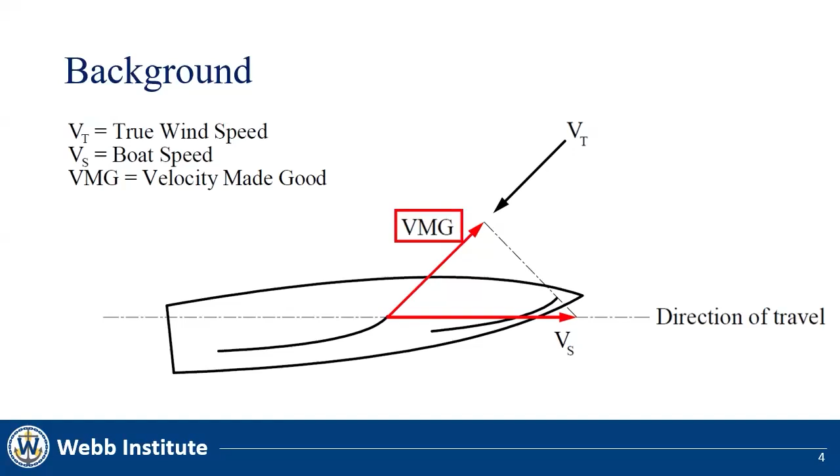One way to increase VMG is by decreasing the leeway angle of the sailboat with keel rotation. The leeway angle is the difference between a sailboat's heading and direction of travel, and is essentially the angle of attack of the boat. When the sailboat moves through the water, its hull and appendages act at the leeway angle to create lift. By rotating, the keel acts at a greater angle of attack, which can be described as the sum of the leeway angle and the keel rotation angle. At this angle, the keel contributes more lift to the hydrodynamic force balance.

The lift provided by the hull and appendages must remain constant to maintain equilibrium, so the leeway angle will decrease to orient the hull at a smaller angle of attack. Consequently, the sailboat is better aligned with the flow of water, and its resistance is lowered. Because of this, the boat's velocity will increase, and with it, VMG.

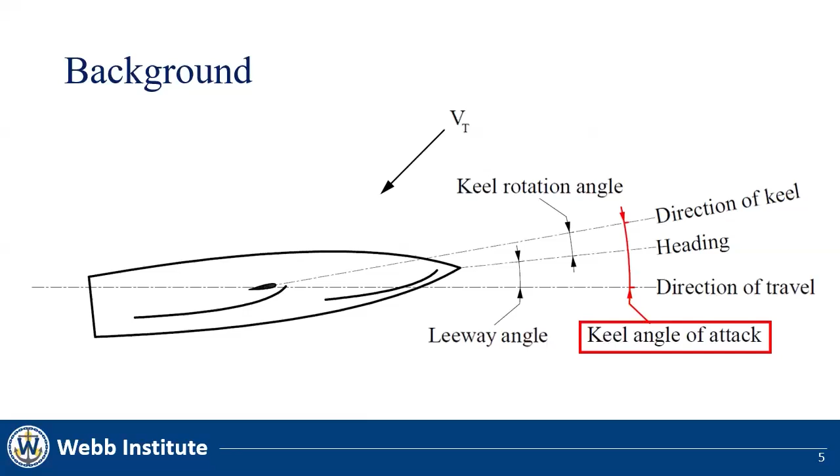One sailboat was found to use keel rotation to successfully accomplish this effect. This is Rampant, a sailboat created by Roger Martin Design in 2004. Her keel is mounted on a rotating drum whose angle is controlled with a line in the cockpit. The design engineers claim Rampant outperforms her velocity predictions, but no information has been published regarding the impact of keel rotation on performance. This brings us to the objective of this thesis, which is to determine the effect of a rotating keel on the upwind performance of a sailboat using a computational fluid dynamics-based velocity prediction program.

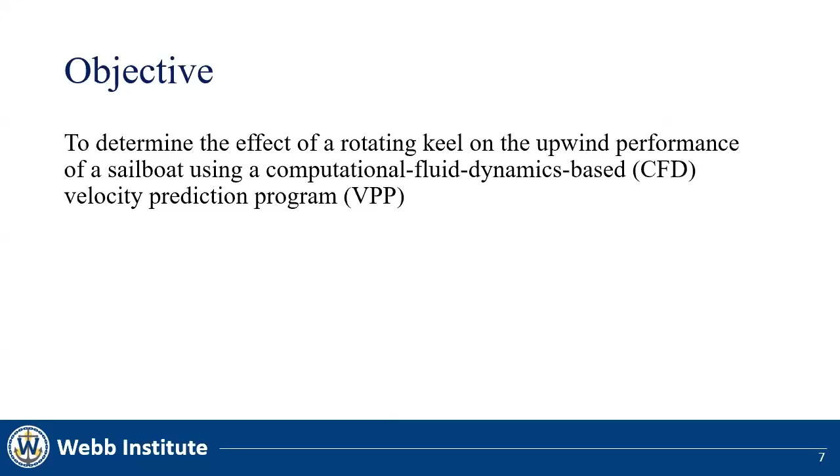I will continue by discussing the theory before explaining the convergence study. I will then pass the presentation off to Rayne, who will describe the VPP workflow before discussing our results and conclusions before closing with recommendations for future work. Courtesy of Farr Yacht Design, the test vessel for this thesis was a Farr 36. This is a medium-sized sailboat raced in high-performance settings, which made it a suitable candidate for analysis. To evaluate the impact of keel rotation on its performance, we decided to create a VPP.

To predict the performance of a sailboat, a VPP balances sail forces against hull forces until a state of equilibrium is identified. Like any steady-state dynamics problem, there are two conditions which must be satisfied. The sum of the forces is equal to 0, and the sum of the moments is equal to 0. Here are those two equations expanded to account for the most significant forces and moments in this problem. For the force equilibrium, this means that the thrust from the sails must equal the resistance from the hull and appendages. For the moment equilibrium, the heeling moment from the sails must equal the righting moment from the hull and the keel. When these two equations are balanced, the steady state boat speed, heel angle, and leeway angle can be identified.

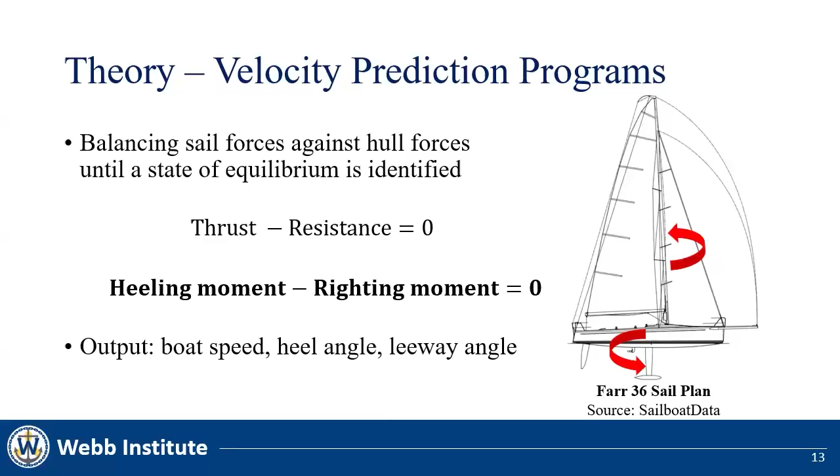There are several popular methods for modeling the forces acting on a sailboat in a VPP. Choosing a method to calculate the hydrodynamic and aerodynamic forces largely depends on the computation time and required fidelity of the VPP. High fidelity VPPs will use fully viscous computational fluid dynamics, or CFD, to model hydrodynamic and aerodynamic forces. While these VPPs produce the most accurate results, the computation time is longer.

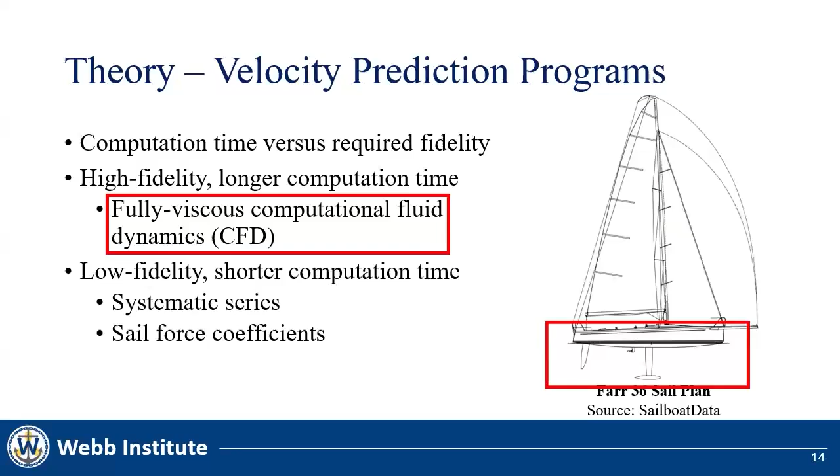In contrast, low fidelity VPPs will model hydrodynamic forces with systematic series and aerodynamic forces with sail force coefficients to characterize the effects of the mainsail and the jib. These VPPs are less accurate, but they have greatly reduced computation times. To create a VPP with minimized computation time and enough fidelity to resolve the small effects of keel rotation, it was decided to use CFD for the hydrodynamic forces and sail force coefficients for the aerodynamic forces.

The sail force coefficients used today by the Offshore Racing Congress are based on coefficients developed by Hazen in 1980. For context, the ORC is an organization who creates ratings to handicap the performance of sailboats so that different sailboats can race fairly against each other. To do this, they developed a set of coefficients which could be used to predict the performance of any sailboat.

These coefficients describe the lift and drag of each sail as functions of apparent wind angle, which is the angle of wind experienced by the sailboat. When sailing upwind, the apparent wind is stronger than the true wind because the speed of the boat adds an extra velocity component to the wind speed.

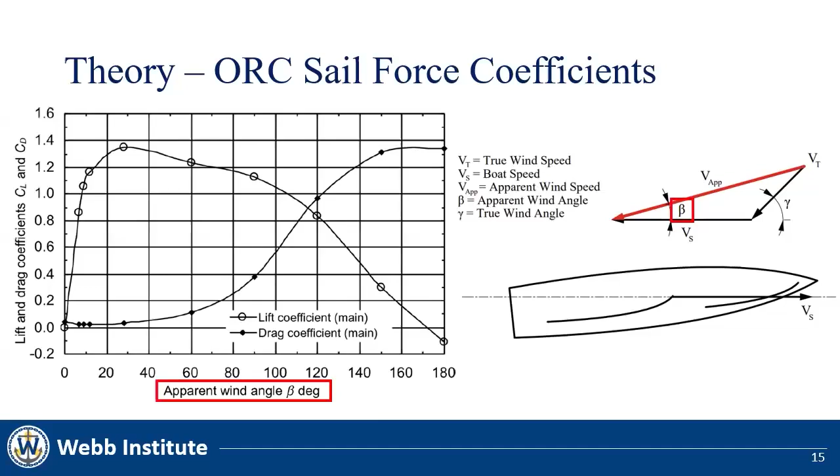In the graph shown above, these coefficients represent the lift and drag of a mainsail. While these coefficients may seem like they are specified at random intervals, these apparent wind angles actually represent typical points of sail encountered while racing. Using these coefficients, the lift and drag of any sail can be calculated using rho, the density of air, A, the area of the sail, and V, the apparent wind speed.

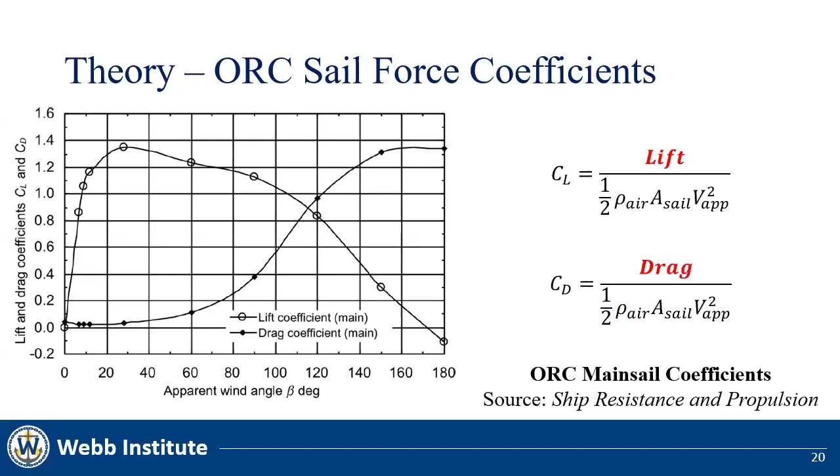These coefficients are the basis of the ORC velocity prediction model used to develop ratings for sailboats, and are what we will use to calculate the lift and drag of each sail in our VPP. To characterize the hydrodynamic forces acting on the sailboat, we chose to use CFD. But what really is CFD? CFD is a numerical simulation of a body in fluid flow. Using the Navier-Stokes equations to numerically solve for the behavior of complex fluid flow, we can calculate the forces acting on a body in a fluid, such as a sailboat sailing upwind.

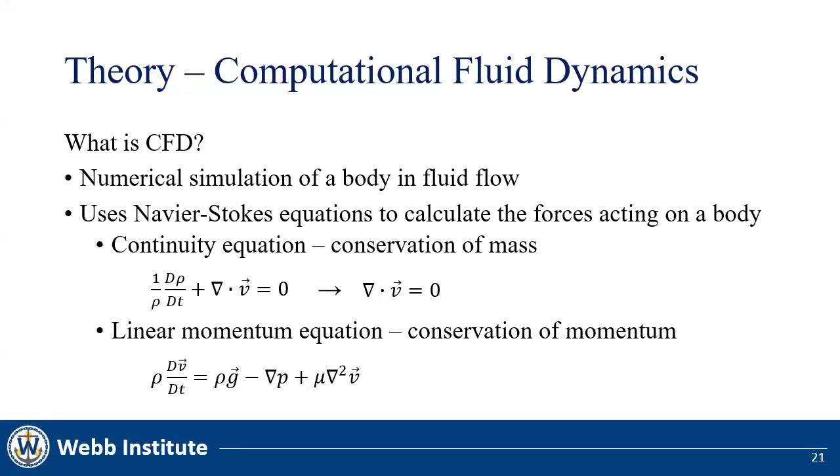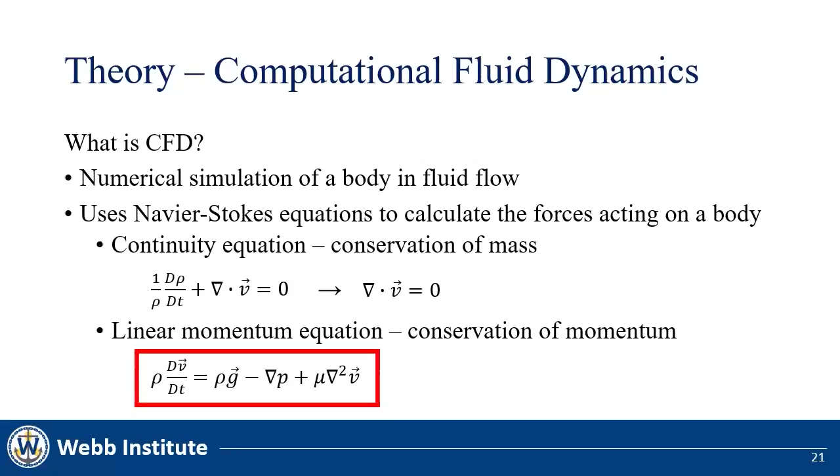The Navier-Stokes equations are comprised of two governing equations, the continuity equation and the linear momentum equation. The continuity equation states that mass is conserved across the boundaries of a problem, meaning that mass is neither created nor destroyed. For incompressible flow, the continuity equation simplifies to this equation, because density is constant. The linear momentum equation states that momentum within the domain of the simulation is conserved over the course of the analysis.

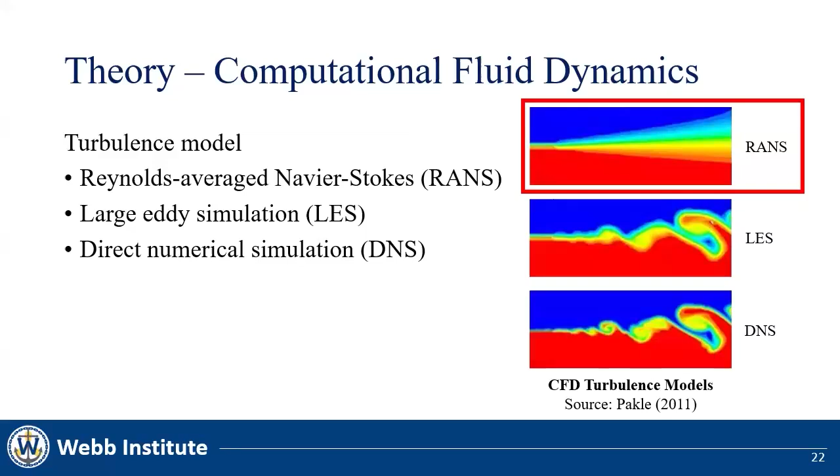We elected to use RANS because it is computationally efficient compared to LES or DNS, and the refinement of the solution is acceptable for our analysis. RANS is also the model of choice in other CFD-based VPPs.

Before creating the VPP, it was necessary to complete a convergence study to develop the computational domain of the simulation. A convergence study is performed at the beginning of a CFD analysis to identify the optimal domain size, mesh density, and time step. Each parameter is changed while observing an output of the simulation, for example, resistance, as it approaches a single converged value. A trade-off must be made between increasingly accurate results and extensive computation times. The goal of the convergence study is to identify the computational domain which provides the best answer for the shortest computation time. The first parameter we iterated on was domain size.

The domain size is the computational extents of the simulation. We followed the guidance of the International Towing Tank Conference on establishing a base domain size, which can be seen here. We then increased the domain size in all directions by 10% and 20% and monitored its effect on resistance.

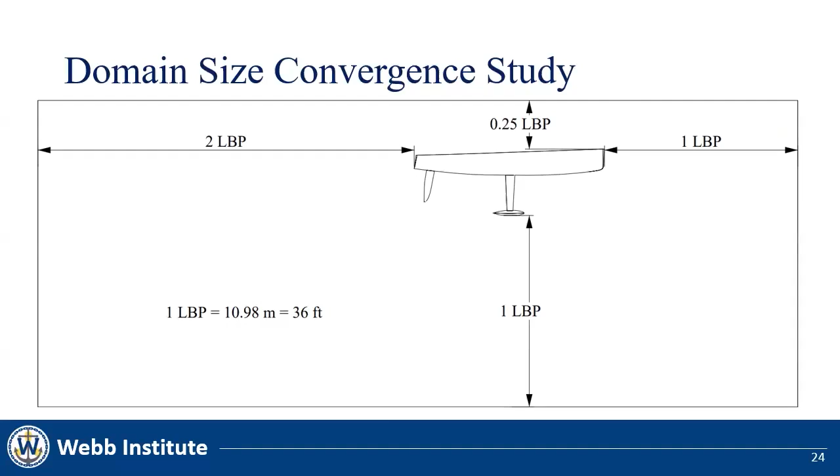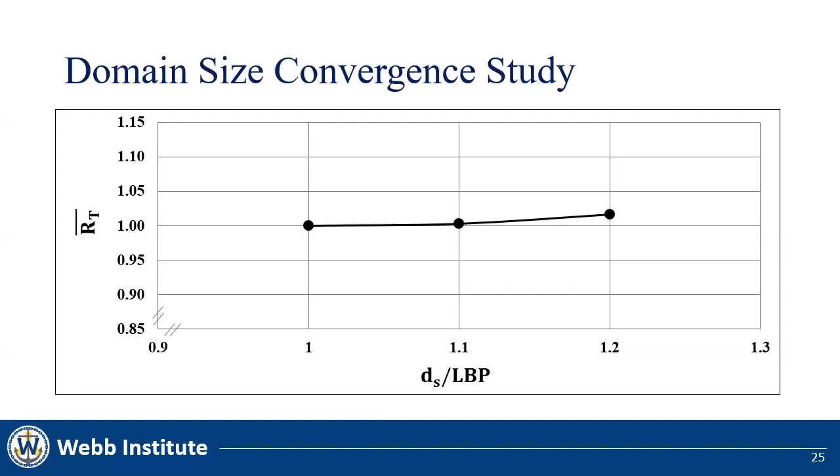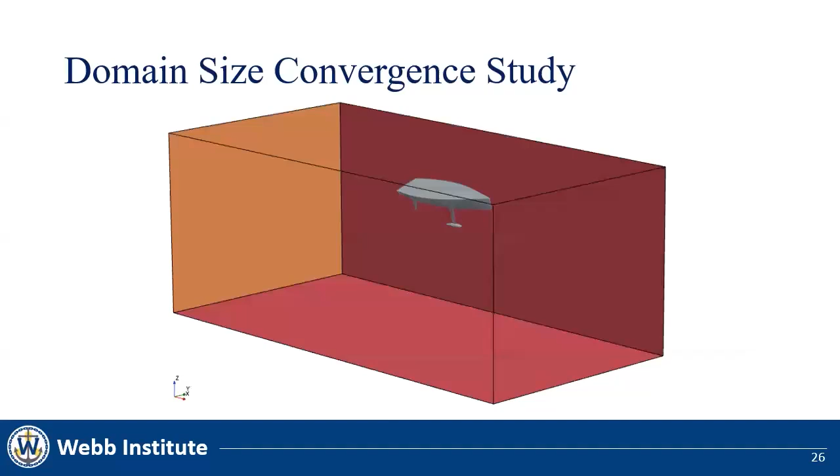It was decided that this small increase in drag was not worth the increase in computational time associated with a larger domain. Thus, the final domain size was the domain proposed by the ITTC recommendations. Here we can see the final domain in 3 dimensions.

The next parameter which was iterated on was mesh density. An essential part of setting up a CFD simulation is creating the mesh, where the computational domain is broken down into finite elements called cells. Each cell uses its inlet conditions to solve the Navier-Stokes equations and produce a set of outlet conditions. These outlet conditions are fed to the surrounding cells at each time step of the simulation.

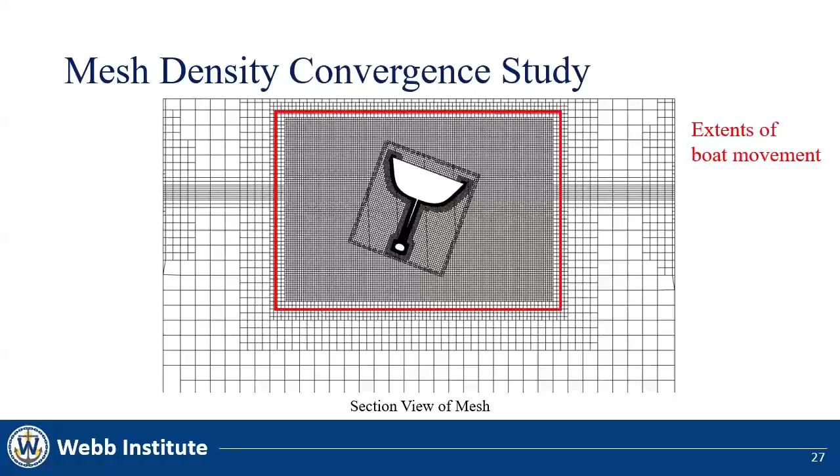This image shows a cross-section of the volume mesh we developed at approximately midships. In areas of importance, the mesh must be refined to better capture the response of the fluid. For our simulation, we refined the free surface, the possible extents of boat movement, and the hull and the keel. Each of these local mesh refinements is defined as a percentage of a base mesh size.

After completing the mesh convergence study, it was decided to use 0.08 meters as our base mesh size, which resulted in a cell count of approximately 6 million in the computational domain. The mesh convergence study was completed using a grid convergence index method, which ensured the base mesh size resulted in a solution within 3% of convergence.

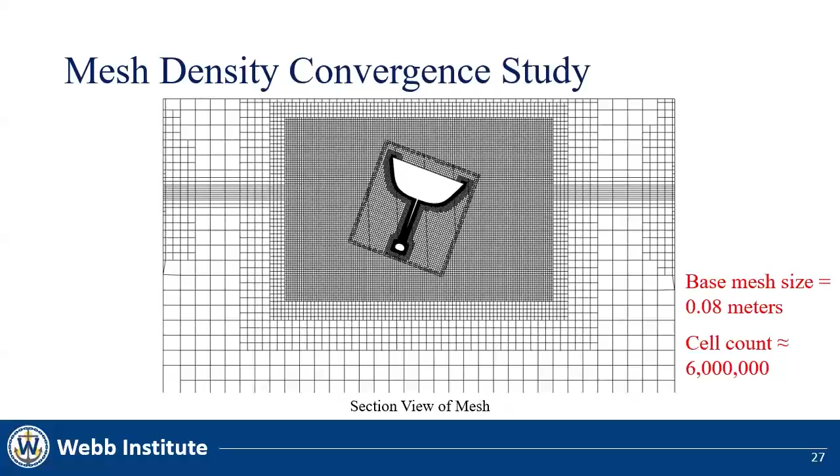The final parameter iterated on was time step. The time step is the interval at which cells pass their computed outlet conditions to the next set of cells as inlet conditions. Smaller time steps lead to longer computation times, while longer time steps lead to shorter computation times. Within each time step, the solver will iterate several times on the solution to reduce the residuals, which are the difference between the solution expected from physics and the solution calculated by the solver.

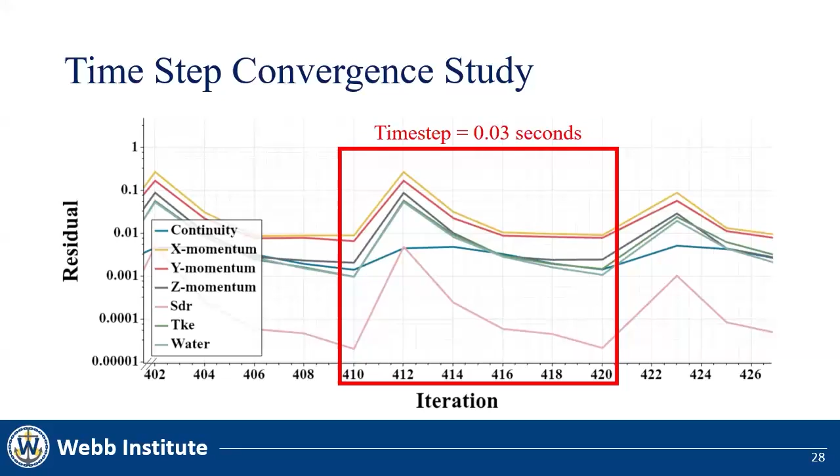I will now pass the presentation off to Rayne to discuss the workflow of the velocity prediction program. Thank you, Anna. Now that Anna has discussed the theory behind velocity prediction programs and how we developed our computational domain, I will discuss how we built our VPP and our results.

We chose to use StarCCM+ for CFD because of its high level of customizability, which allowed us to directly integrate the Sailforce model into the simulation. Additionally, many modern VPPs use StarCCM as their platform of choice. In our VPP, an initial boat speed is estimated, and the sailboat is released into 4 degrees of freedom motion. Instead of allowing the sailboat to move in the forward or transverse directions, the boat is fixed such that it can only move vertically and rotate about its center of gravity.

To help you visualize this concept, consider this boat in a tow tank. This boat is free to move in 2 degrees of freedom, but is not allowed to move forward or to the side. Here, the water speed is effectively the boat speed. This is the same approach we used in our simulation. To reduce the computational domain, we're creating a smaller domain where water enters at the speed of the sailboat, rather than a larger domain where the boat moves forward over the course of the simulation.

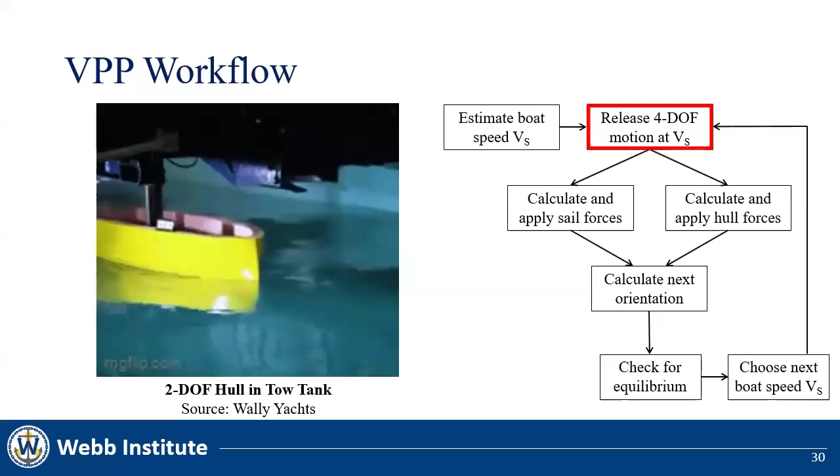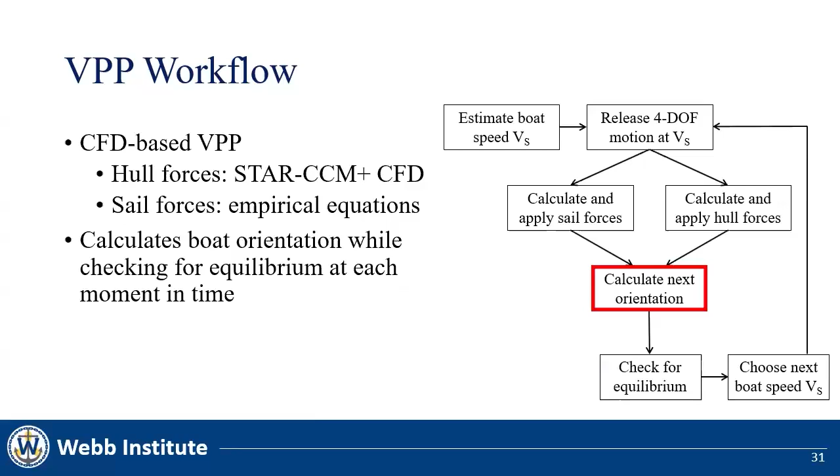For the purposes of our VPP, this means we cannot edit the speed of the sailboat during the simulation. Instead, we calculate the sail forces using empirical equations and allow StarCCM to apply the forces for one specific boat speed. For each time step in the simulation, the next orientation of the boat is calculated from the imbalance of forces.

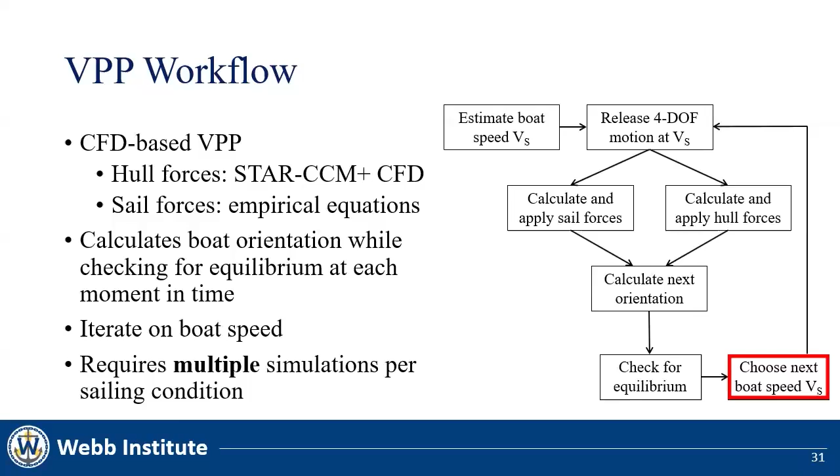Eventually, a steady state will be reached, and it is possible to check if the boat is in equilibrium as defined by our VPP. If the sail forces are larger than the hull forces, the boat speed needs to increase. And if the sail forces are smaller than the hull forces, the boat speed needs to decrease. Because the setup of this VPP does not allow the boat speed to be changed during a simulation, multiple simulations are required to determine the final boat speed for each keel rotation angle.

In StarCCM, there are several ways to model the motion of a boat. We used a popular motion module called dynamic fluid body interaction, which is typically used in marine resistance simulations. Within this module, there are several motion options which were applicable to the VPP. While we could have allowed the Farr 36 to move freely, we chose to use the equilibrium mode.

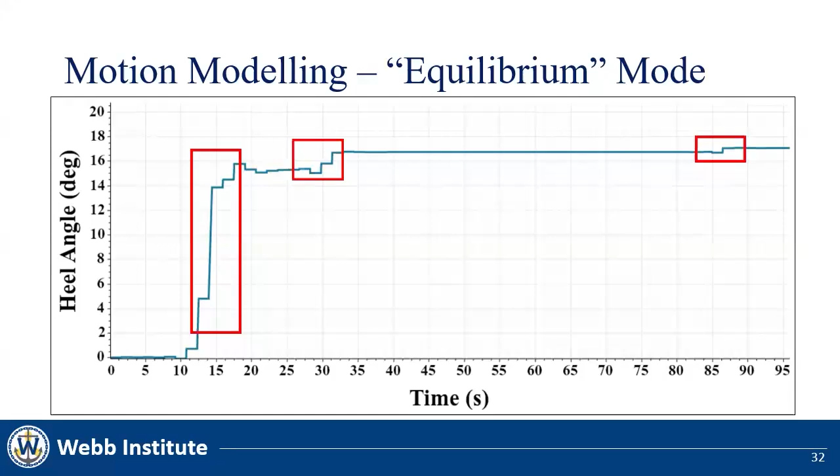This mode locks the vessel at an orientation for a few seconds of simulated time before iteratively changing the orientation until the forces and moments in the active degrees of freedom are balanced. As we want to find an end condition where all the forces and moments are balanced, this was our best option. These iterative changes can be seen on this plot of heel angle as a function of time and are identified by the sharp jumps in orientation.

The equilibrium motion mode finds a position where all the forces and moments will sum to zero, but it only does so in the directions the boat is free to move. The boat is not free to move in the transverse direction. So ensuring the sum of forces in the transverse direction is zero has to be done another way.

Thus, the rudder force is defined such that it always ensures the sum of forces in the transverse direction is equal to zero. This means the rudder force is always equal to the side force of the sails minus the transverse force from the hull and keel. It does not replace the lift from the keel, but simply closes the problem.

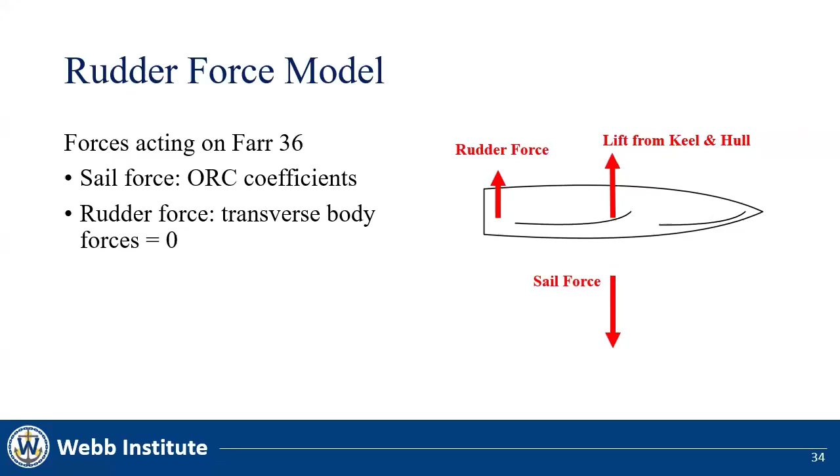This way, the equilibrium motion mode will find the position which makes the moment from that rudder force equal to the turning moment from the sails. This method of modeling the rudder force is much simpler than what is done in some other VPPs and allows this VPP to work correctly within its parameters to find equilibrium.

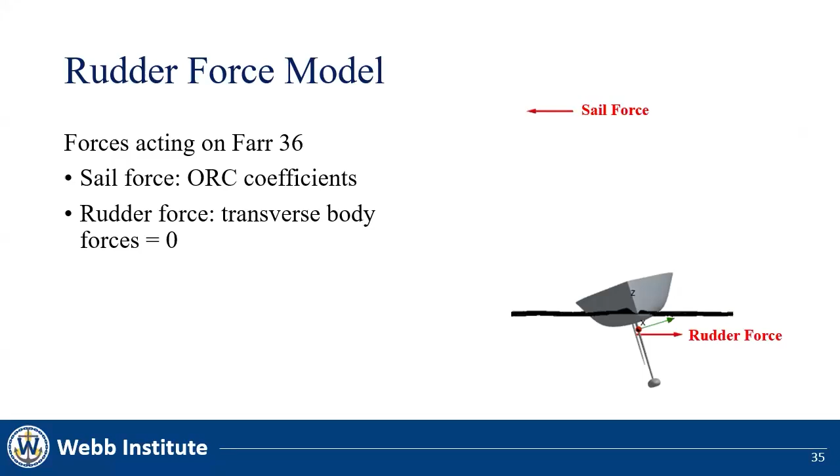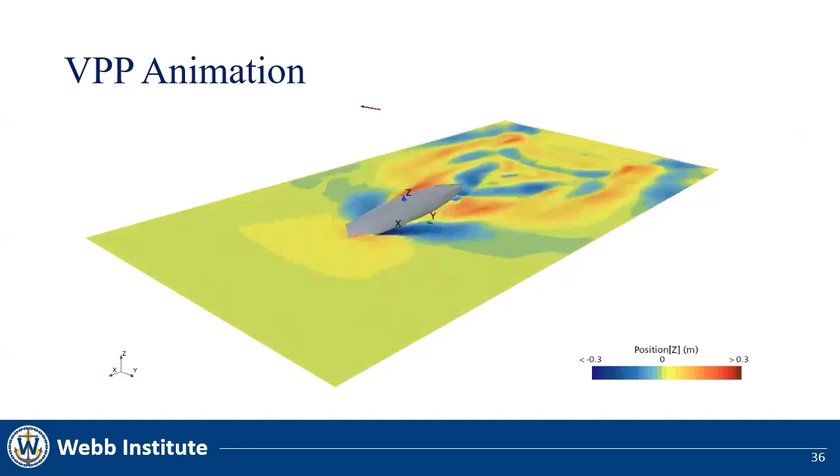Now, let's look at it in action. I promise this isn't actually how a sailboat moves. After a short period where the water is allowed to come up to speed, the equilibrium model starts to change the position of the Farr 36. First, it trims it forward, and then it heels dramatically before eventually finding a steady state condition where the boat is in equilibrium. The colors on the water indicate the elevation of the free surface, with red representing crests in the wake and blue representing troughs.

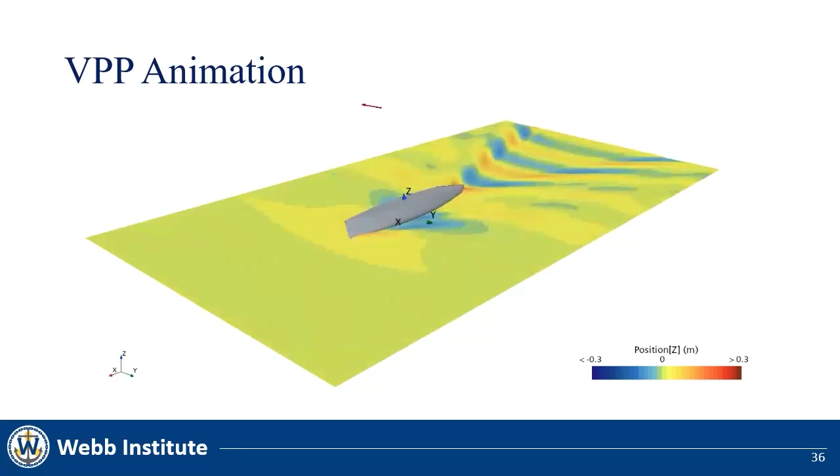For this study, we chose to test the Farr 36 in 10 knots of wind at 39 degrees of true wind angle, after looking at the output from Farr Yacht Design's VPP. This was because 10 knots was the highest wind speed before the boat became overpowered and the aerodynamic force analysis increased in complexity. Also, at that wind speed, a true wind angle of 39 degrees had the best VMG result, making it a good starting point for this analysis.

4 keel rotation angles were chosen: 0, 1.5, 3, and 4.5 degrees. These angles were chosen because they were estimated to decrease the leeway angle to near zero at the higher keel rotation angles. After a few iterations, the final boat speeds can be identified for each keel rotation angle.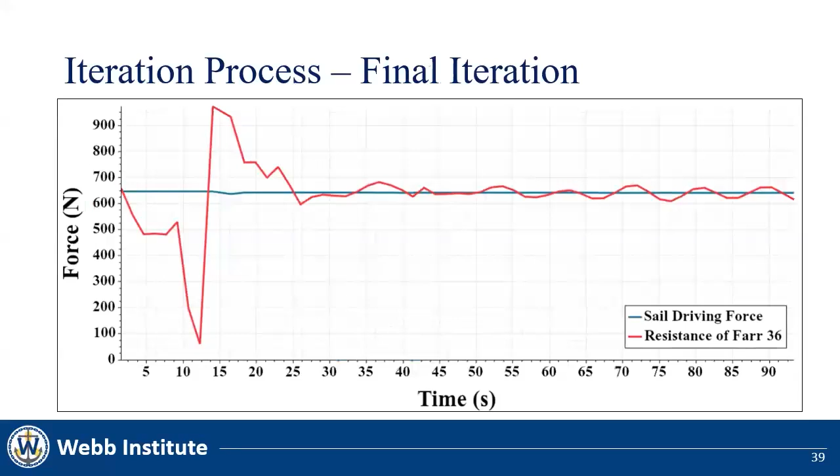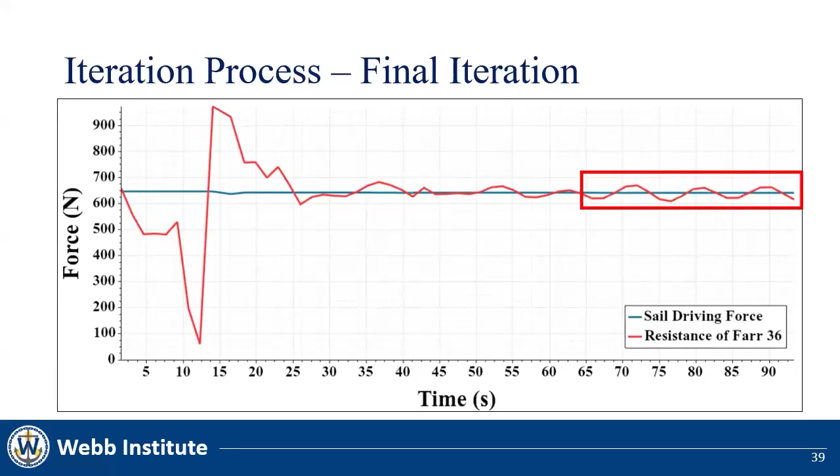The average value of resistance in this case is slightly higher than the sail driving force at the end of the run. This means the speed of the boat needs to be decreased in the next simulation so that the resistance will decrease slightly. This graph is the same as the previous, but shows a new simulation where the speed was slightly lowered. Now the resistance is oscillating around the driving force of the sails, meaning the boat is fully in equilibrium. And this speed is the final velocity prediction for this keel rotation angle.

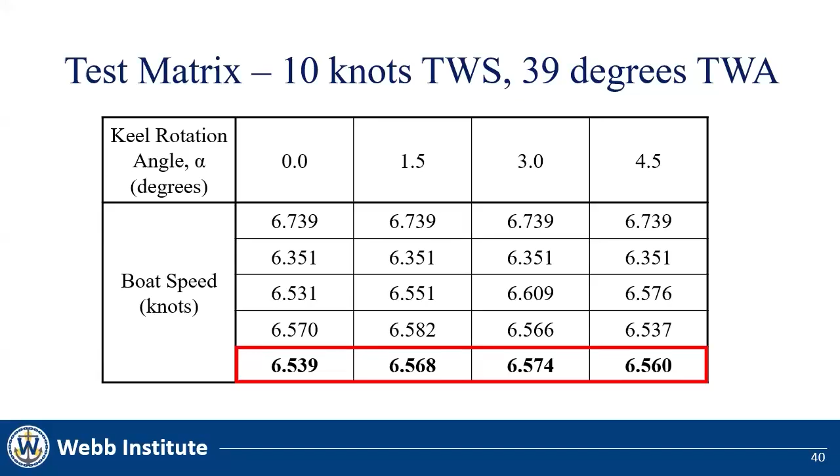The iteration process was completed for every keel rotation angle. The final velocity predictions are found at the bottom of this table, and we can see that the values are slightly different for each iteration. Now we can look into the results in more detail.

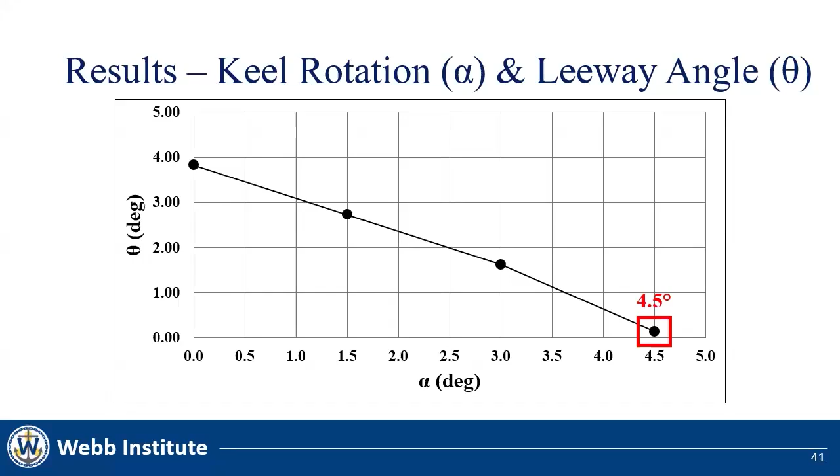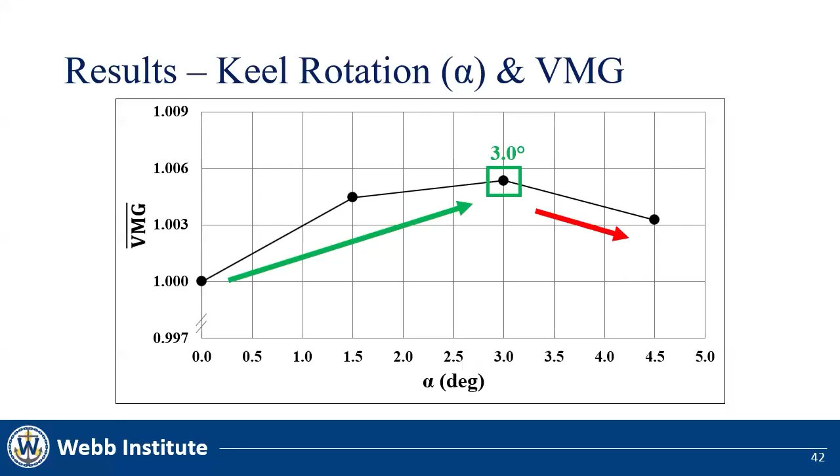This graph is the key result of the investigation. The x-axis again shows keel rotation angle alpha in degrees, while the y-axis now shows a non-dimensional representation of VMG. The VMG is non-dimensionalized using the base VMG predicted at 0 degrees of keel rotation to easily show the difference between the results. The notable trend here is that keel rotation slightly improved VMG, which was what we predicted should occur. The most significant performance gains occurred at 3 degrees of keel rotation. After 3 degrees, additional keel rotation does not provide further benefit, but is still better than none at all.

So what does this mean? The best results were observed for a keel rotation angle of 3 degrees, and the VMG increased by over 0.5%. This is a bit of a vague conclusion, so let's give it a physical interpretation. For a 15-minute upwind leg, a Farr 36 with a keel rotated to 3 degrees would gain 1 boat length over a Farr 36 with no keel rotation.

While this impact is somewhat small, sailboat racers are always looking for ways to gain distance, and 1 boat length can be the difference that results in a win. That being said, 15-minute upwind is quite long, and there are many other factors that could happen in that time which would make a larger difference than 1 boat length.

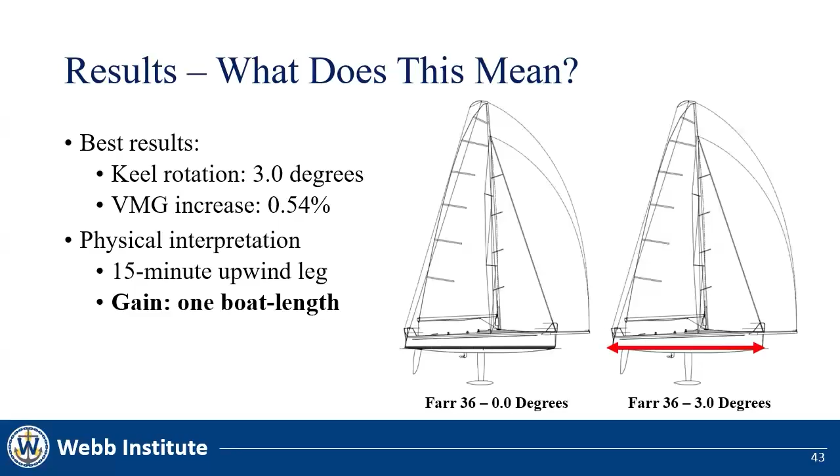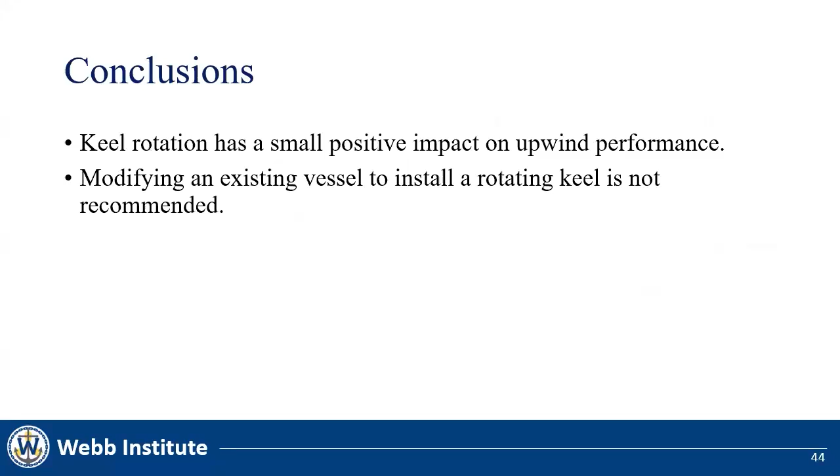Ultimately, the results demonstrated that keel rotation has a small positive impact on upwind performance. However, the gain is quite small, so modifying an existing vessel to install a rotating keel is not recommended. The price of such a modification would be quite high, and there are likely other places that money could go to make the boat faster for less. It is also important to mention that installing a rotating keel could result in a rating penalty in some handicap rating systems, which would negate all the benefits to performance.

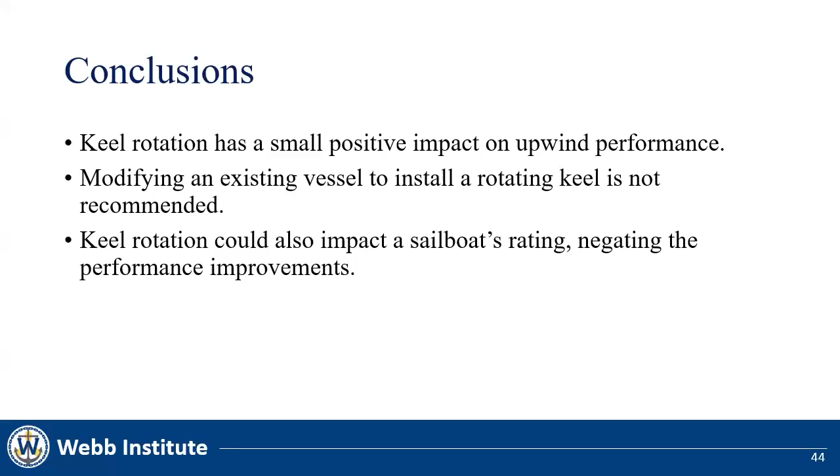For future work, the immediate continuation of this thesis could be to keep testing more keel rotation angles and wind speeds. A broader expansion of this thesis could use the sail force model we integrated to create a 6-degree of freedom VPP, which requires a new rudder force model. This VPP could also be used to investigate the effect of different modifications to the boat we tested, or even to test entirely different boats. The possibilities are very open, and VPPs can be used for anything that requires the prediction of a sailboat's speed.